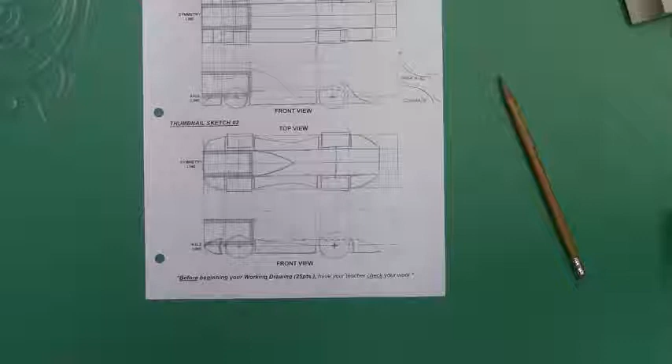You're going to find in your workspace today, you're going to have a compass, which in a moment we'll talk about the best way to use this. You probably have some type of French curve. Honestly, let's not worry too much about this right now. Everything I want you to draw is freehand, even your curves.

Don't get me wrong, you could incorporate this right now into your sketch. I guess you could, but a lot of what I'm going to do is just simply freehand, use this later to go over my curves and clean them up. And obviously you have a ruler. Okay? We've got all the tools we need. So let's focus on this tool for right now, this thing.

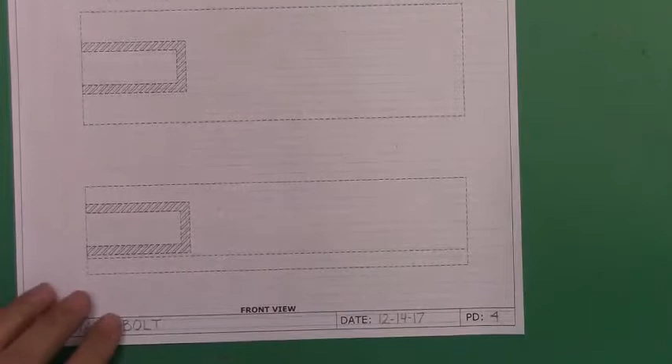So if you flip this paper over, yesterday, put in our name, date, period. Okay? We spoke a little bit about how this paper is being broken up. First of all, this drawing is 1-to-1 scale, which means it's actual size, correct? Yep. So what you see is what you get. So what we also have here is a grid. And every one of these squares measures 5 millimeters by 5 millimeters, 5 by 5.

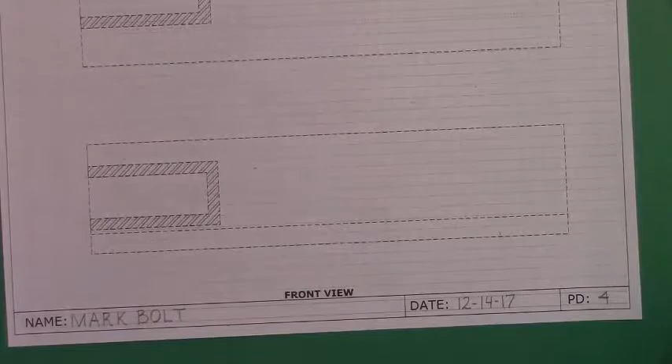We also have, if we take our ruler, a large rectangle that if I measure it, it measures 21 centimeters, which is 210 millimeters. Okay? If I measure the height of it, it measures 50 millimeters. So according to my specs, I cannot make my car body longer than 210, which is this point here, and no taller than 50, which is that point here. So there's my workspace, folks. My car's got to fit inside this space.

Dashed line here, we're going to refer to this as our axle line. So somewhere here and somewhere here, we're going to be drilling 2 holes in time. And then we look at this shaded area, this hatched area. Be careful here. The specs tell you that when you're drawing this, the minimum thickness on your drawing is 5. Well, if you were to measure this right now, you would actually find that there's your 5 millimeter thickness. Okay? You can draw right up to the edge of that. You can do that. But there is a little side note here.

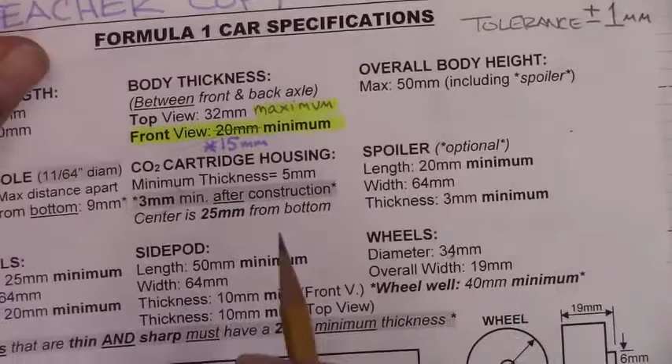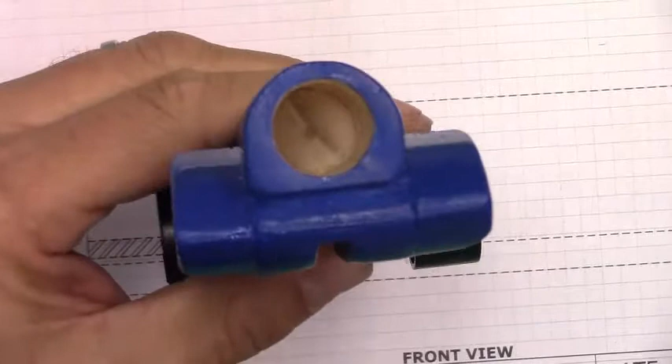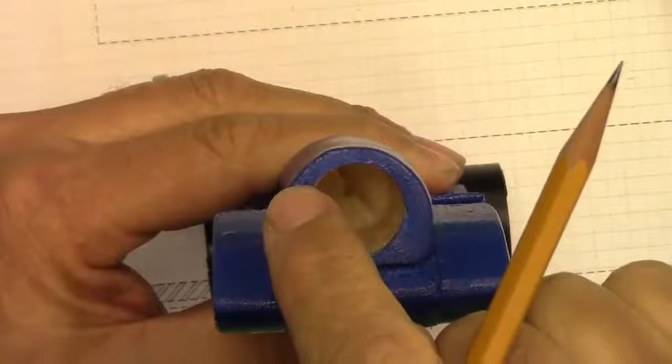When the day comes and you're actually cutting out your car and then sanding it, cleaning it up, I will let you, all said and done, you can take this CO2 cartridge housing and go, for example, from 5 millimeters, you can make it as thin as 3. There's no tolerance here, meaning not plus or minus 1, just 3 minimum. So this is the only part of your car where what the specs say is what it can be in terms of minimum thickness. Okay? So this can be no thinner than 3. No thinner. All said and done.

The rest of this design does have a tolerance of plus or minus 1. So in reality, I say 180 to 210. If you turn in a car and it's 179 in length, is that okay? Yeah, you're fine. Don't cut it to 179. Cut it to 180. Keep in mind you're probably going to be removing about 1 millimeter of material when you're sanding it. Okay? So that's kind of where the tolerance comes in.

All right? Now, one other thing we'll talk about in a minute is this number here, 15. Front view, body thickness between front and back axle. We're not going to spend too much time talking about that yet. We're going to first lay down some lines here for our car body. So here's what I'd recommend you do. I'd recommend right now that you pick up your pencil and start drawing / sketching a car body.

Okay? Keep in mind that there was one little step I had you do yesterday, which was take your ruler, put it in the bottom left-hand corner, right here. And as I measure right at the 18 centimeter mark, right here, I put a little dot on my paper. Because I know that when I draw my car body right now, the front of my car can be no shorter than this, and obviously no longer than that. Do we remember that? Okay? So make sure you have that mark in place.

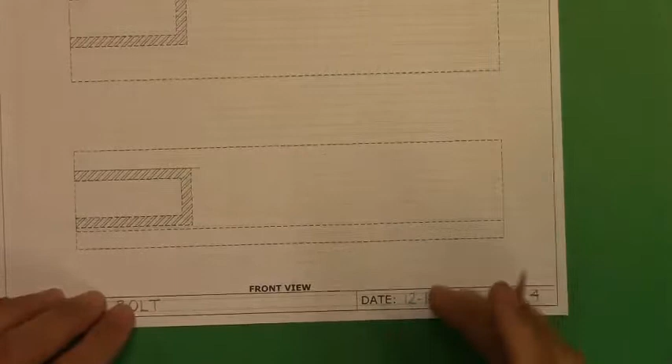Now once I get here, I need to think about obviously a nice aerodynamic design, something we've been talking about on the front of your paper. So I'm just going to freehand, and I might end up with some type of bullet shape, so I'm just going to stop right about here for now. Just going to leave it just like this. Okay. And then I'm going to go ahead and pick up my ruler and continue forward.

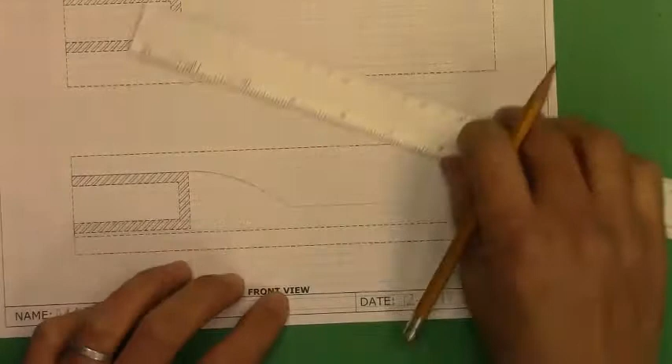Okay. And then for now, I'm just going to draw something that probably looks kind of like this. Just for now. This could all change. This is just the beginning. Okay, I'm just going to stop right there. So if I look at what I've done so far, height-wise, we said no taller than 50, and if I measure this, that's 40, so that's fine. No taller than the block. Lengthwise, as long as the front of your car falls somewhere between 180 and 210, that's legal.

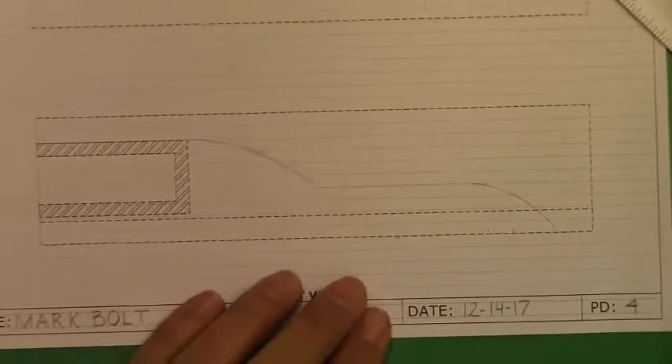But let's keep in mind that there's one other spec that's going to come into play, and I just want to talk briefly about it. It's this spec right here. Body thickness between front and back axles, front view, that's the view we're drawing, 15 millimeters minimum. So let me show you a car where I can actually show you the specification. Let's take a look at this blue car here. So remember, body. We're not talking about airfoils, not talking about side pods. Let's take the body of the car. So here's your rear axle, here's your front axle.

So what this spec means is that if you look at this area, the thinnest part of your car body between the front and back axle can be no thinner than 15 millimeters. If I were to take this ruler and measure it and see what this kid did, I would say the thinnest part of this car is right here. Remember, not the side pod, the car body. This measures about 20 millimeters. So this student could have made it thinner had they wanted to. They could have taken off 5 more millimeters and still be within specs. So this is the thinnest part of your car body.

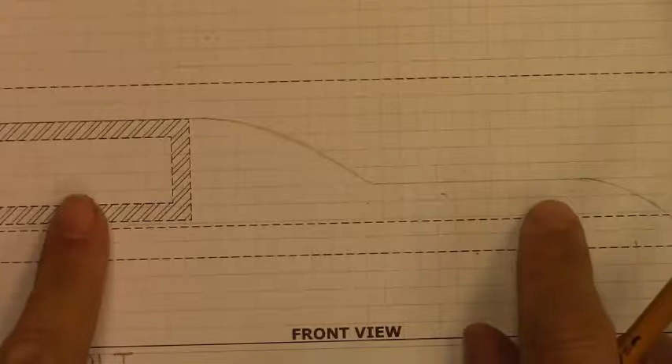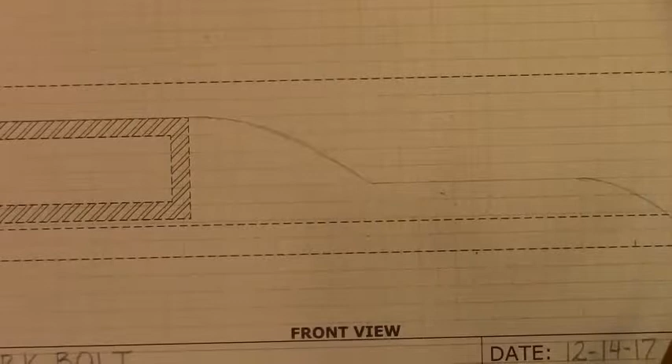Car body. You'll notice with mine, first I don't have any wheels, no axles, so it's really hard to say where the thinnest part of your car body between your front and back axle is. Can't really tell you yet, but I did leave this section here kind of thick. For right now, I made mine 20, but I could have dropped down even further and made this 15. But I'm going to leave it at 20 for now because I have an idea of something I'm going to do later. So I'm actually leaving this thicker for now, but it will change in time. Okay? So if I look at my car body, for now, that's legal. That's acceptable.

Any questions? Yes? Say it again?

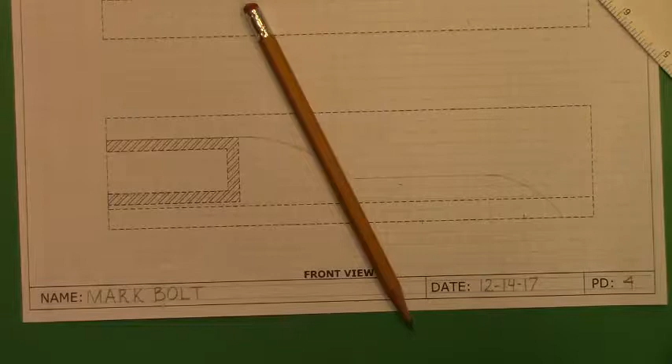Okay, great question. So here's why I put this here, between front and back axle. Because what she's saying is exactly what's happening to all of you. Once I get beyond the front axle, does my car start to get thinner and thinner and basically end at a point? Yes? Yeah, most of you are going to find that. And so once again, the spec is only referring to what's happening between here and here, which obviously then allows you beyond the axle to make this come to a point. So yeah, that's fine. Okay? Good question.

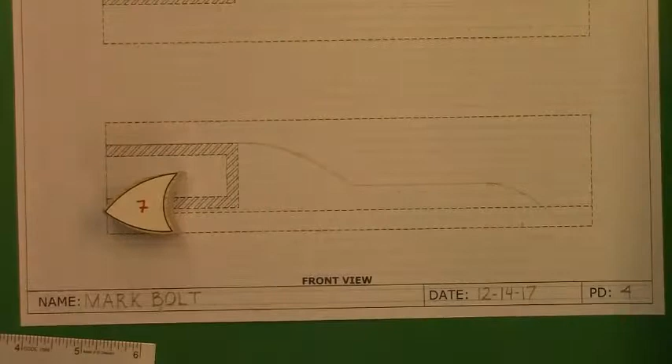All right. Moving on. So now we come to the airfoils. Okay, so here's an example of what an airfoil could look like. That could be a rear airfoil. And for example, that could be a front airfoil. Okay, so now we get to the airfoils. Keep in mind, after airfoils, we're going to have wheels.

And then we're going to eventually have side pods that kind of go in between. Okay, so there's all these different parts. All right? So we talked about convex, we've talked about concave, we've talked about redirecting the air over and around the wheels. So let's take a quick look at our specs.

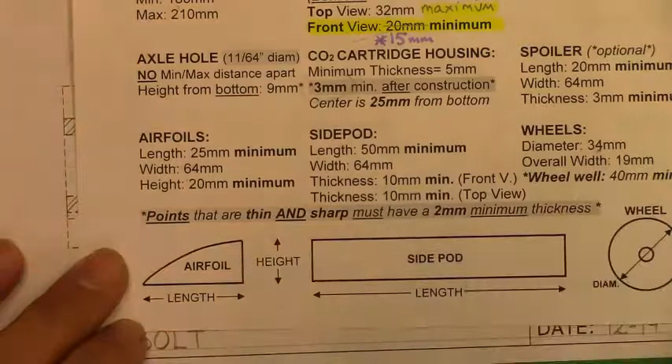So if I look at my specs for an airfoil, here's what I got. Airfoils. Minimum length, 25. So the minimum length is 25 millimeters. Don't worry about width. That has nothing to do with the front view. But height does. Minimum height is 20. Okay? So minimum 25. Minimum height 20.

Okay, so here's what I like to do. I'm going to start with my rear airfoil. I personally like to start in the back, knowing that I need to put a wheel here. Okay? So I'm going to kind of mark some limits. So if my rear airfoil is going to start here and end here, I know that it has to be at least this long. That's 25. So it needs to be at least this length, minimum. It can be longer, we know that, but at least from here to here is 25.

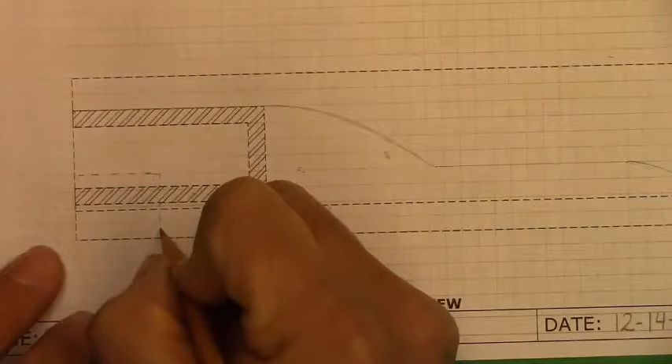I'm going to put my limits for height. Height would be from here to at least here. So if you kind of look, this is my workspace. Now I'm going to do something just so you can visually see what I'm doing. Don't do this. I'm just going to make a box just to use this as kind of an example. So if you imagine there's this rectangle on your paper that measures 25 by 20, your airfoil needs to either fit in it or it can be larger than. But it can't be much, if anything, smaller than this workspace.

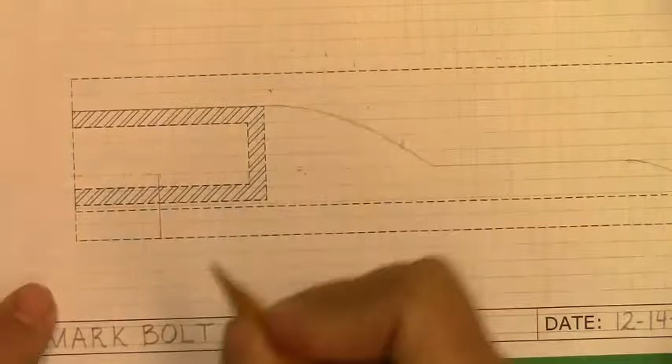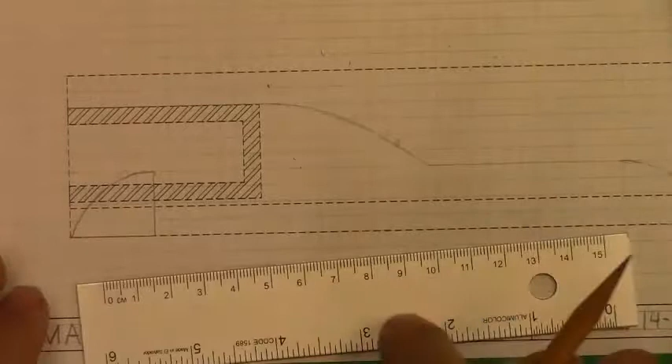Okay? So let me show you what an acceptable airfoil could look like. Let me just erase my box here. I could do something as simple as this. I could say, okay, vertical line here, that's 20 millimeters tall. And then a curve here. And then a line here. Done. That's an acceptable size for a rear airfoil or front airfoil. And here's how I know that. If I measure the furthest point to the left to the furthest point of the right, that's at least 25. And if I measure the height, that is at least 20.

That's acceptable. Okay, let me give you some other ideas. Some kids, rather than make this straight, they might curve this in. Okay, let's just say you do that. Is that still considered legal? The answer is yes. I'm going to use a ruler to show you my limits. So if I take the furthest point to the left and the furthest point to the right, when you measure limits, you put your ruler horizontally. So I could basically say that this has a length of at least 25. So that's legal.

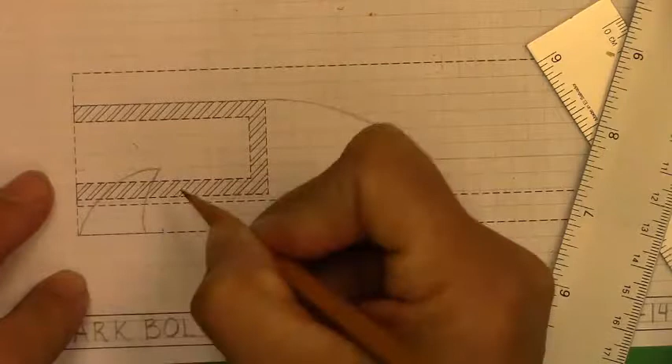Okay, but watch this. What if a student were to draw something like this? Knowing that from here to here is 25, is that still legal? So let's measure our limits. That's the furthest point to the left. Is that the furthest point to the right? No. The furthest point to the right still continues to be that point right there, which once again makes this legal. Okay?

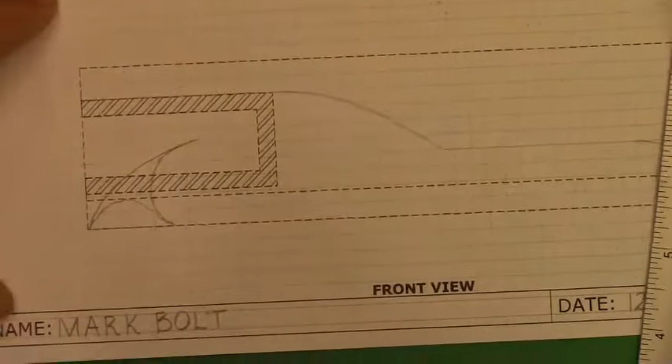But now I'm going to show you something I don't want to see. I hope I don't see this. It looks great on paper, but this will never survive construction. So, as much as I want you to be creative and make some really neat, cool, innovative looking airfoils, you got to be careful doing something like this. It looks cool, but the reality is we're making this out of balsa wood. So when I get an airfoil that looks like that, as cool and neat as it looks, it's impossible to replicate that out of a piece of soft grade balsa wood. Because here's what's going to happen.

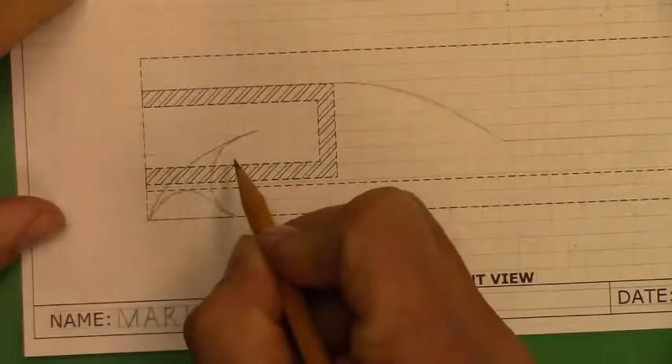Spec-wise, it works. But in reality, it's not going to look like this on race day. Here's why. You're on the scroll saw, cutting, cutting, cutting. I guarantee this is going to snap off. Okay. Big deal, Mr. Bolt. It's still legal. Yeah, for now.

You're sanding. Sanding, sanding, sanding. I guarantee that it's going to break off. Okay. Well, I think I still might be legal. I'm getting close, though. And you're probably going to drop an airfoil once or twice. Or maybe you keep sanding, and next thing you know, that breaks off. Okay, so that's your airfoil on race day. And the bottom line is, that's not legal anymore.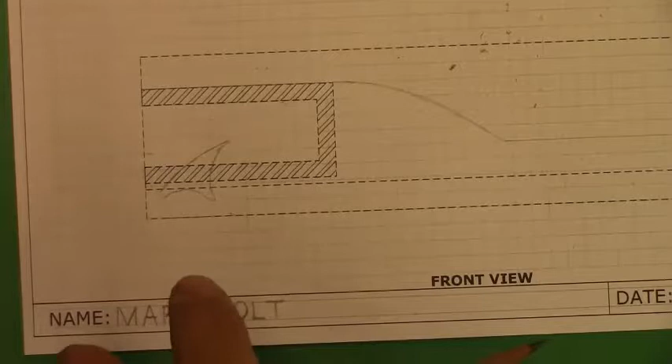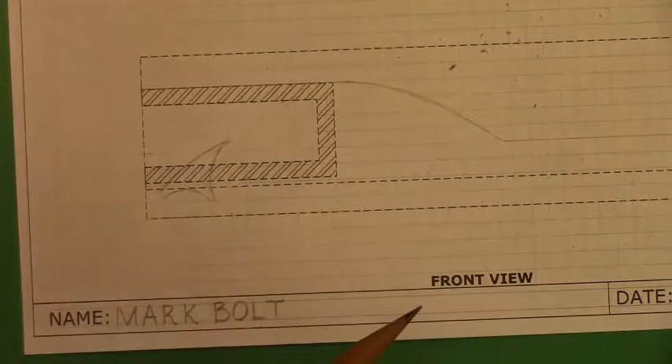Okay? So when you draw airfoils, keep this in mind. If you make something too big or too thick, you can always go back and make it thinner. Of course, it's balsa wood, soft grade. It's like sanding air. It's very easy to shape. What you can't do is say, well, I got a small airfoil, can I make it bigger? Well, here's the short answer. No. Go put that in the trash. Go design a new airfoil. And we need to give you a scrap piece of balsa wood and you need to try it again.

Okay? So let's be realistic here, folks. As much as we're pushing ourselves to make lightweight parts, the reality of it all is we have to have parts that have strength and stability, support. So going back to my limits, there's my minimum height, here's my minimum length. I could get away with doing something like this. Maybe I'm going to curve something in. And remember, work in progress. That curve there could eventually change.

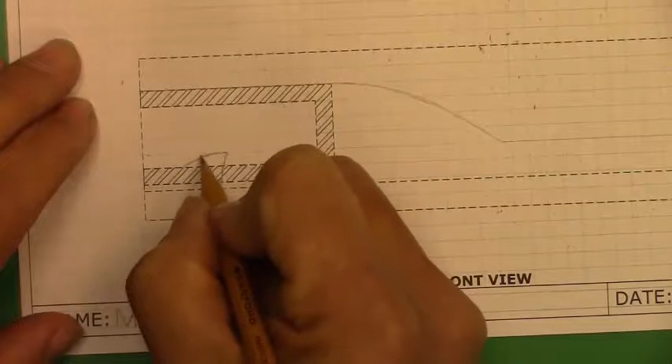Maybe I'm going to draw something like this. And I'm just sketching. And this airfoil here has enough material. Yes, it does have points, sharp points, but they're not thin and sharp points. So remember, I could even in time remove a little bit more material after I cut this out, just to reduce a little bit of mass. But as long as I'm keeping that minimum length and minimum height, that's what's important.

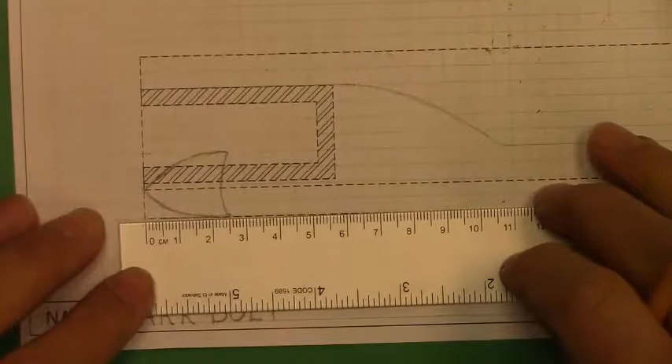Okay? You'll probably remember that whenever we cut wood, we never cut on the line. We always cut just outside this line. So we're not going to cut this exactly 25 by 20. We're going to end up cutting it a little bit bigger and sanding down to the outline of your pattern. So keep in mind, we're always going to cut things slightly larger to begin with. So this is legal. If I were to measure this, overall length is at least 25, and overall height is at least 20. That's legal. Okay? Any questions?

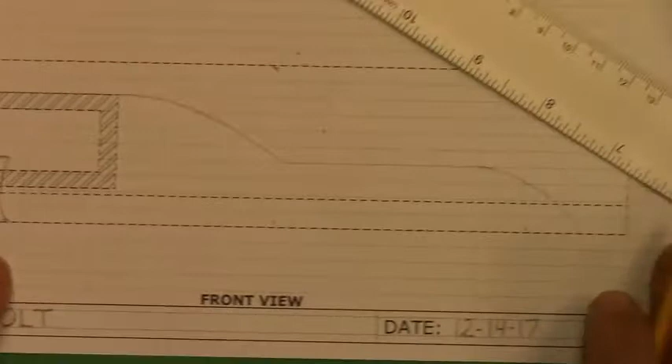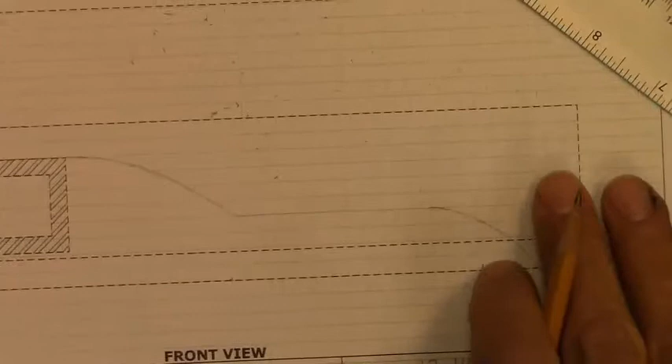Okay. So what do we do next? We draw the front airfoil. Alright, so we're going to take that same step. We're going to do the same thing again, and we're going to draw that front airfoil. Okay? Alright, here we go. So, as I work my way to the front of the car, and it doesn't matter which one you start with, some of you may have drawn your front airfoil first, that's fine.

Here's what's going to happen next. So I'm going to go ahead and go from here to here. And then, like I said earlier, I like to do this. This is something that just keeps me honest. I know that if I'm going to have my airfoil start from the front of the car and go back, the minimum length can be 25. Now it can be longer. I can make this airfoil 40 millimeters long if I wanted to. I could. It's my car. As long as it meets specs. I'm not saying that's the best thing to do, but once again, you could do that.

And now I'm going to draw my front airfoil, and I kind of use a convex shape here. I might do something a little bit different on the front. And who knows, I might even make this airfoil a little bit taller. I might not. We'll see. And just keep in mind, be careful with these really sharp points, so that we're not setting ourselves up for disaster when it comes time to manufacture the part.

Okay, so I'm always keeping in mind that I need a little bit of thickness here. You can always go back and make a part a little bit smaller as long as it still stays within specs. Okay? You can always make those changes. Okay.

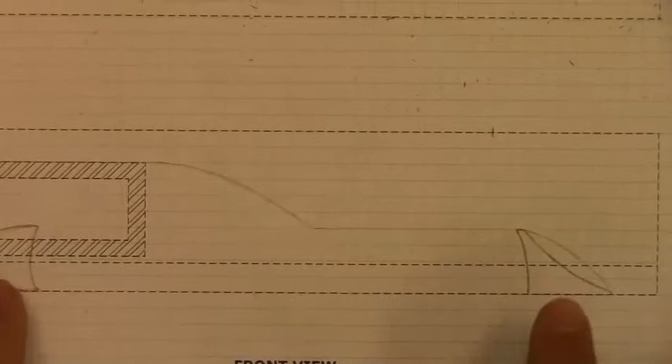First of all, you don't want to move on to this next step until you have double, triple, quadruple checked that these parts meet minimum specs. Don't move to this next step until you're sure that what you've got is, if not spot on, slightly larger than the specs I'm giving you. Because if not, you're going to end up going back and having to make a lot of changes. So, this checks out. This checks out. So far the body checks out, and that could be adjusted.

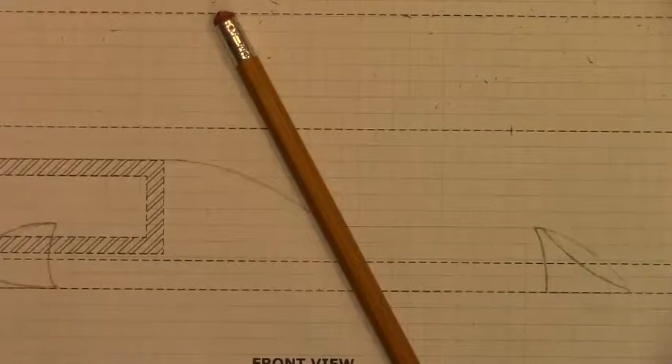We're now going to direct our attention to a new spec. I want you right now just to make sure that things are looking legal in the world of airfoils. And here's how this next spec is going to work. Now that I've got my rear and my front airfoil, let's just say this is a wheel that you're going to put on your car. There's one. And there's another.

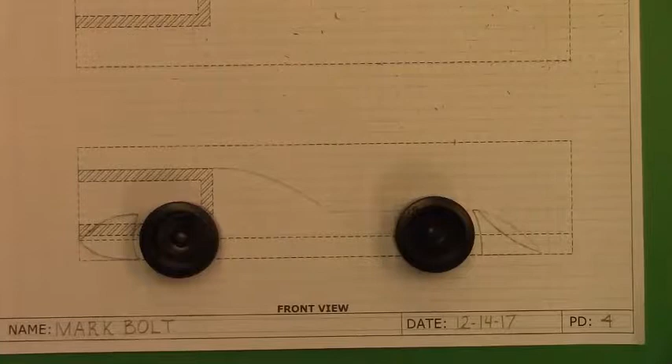So here are a few things we've got to be very careful with. That distance right there between part and wheel. The obvious is you don't want the wheel to be too close, because as it spins it could rub against the part. That's surface friction. So what I'm going to direct you to is this piece of paper right here, and there's two pieces of information we're going to look at.

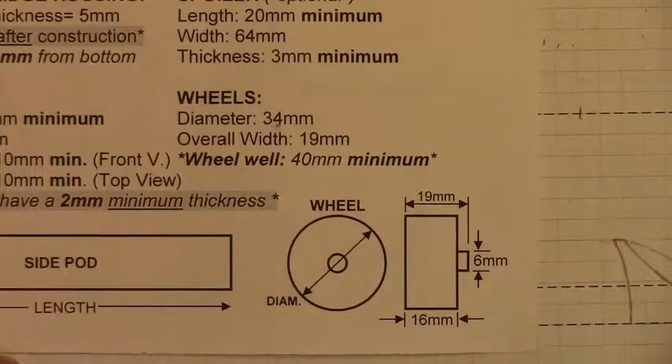The wheels have a diameter of 34, roughly. It's a little under 34, like 33 and some change, but for right now we'll just say that the wheels are 34 millimeters in diameter. If you're looking up on the big screen, you'll see that when we use a compass, I'm telling you which hole to use to accurately draw a fairly close 34 millimeter diameter circle. It's going to be just under, but the wheel itself is more like 33 and some change, so it's close enough. That's an easy thing to do. Draw a circle, been there, done that.

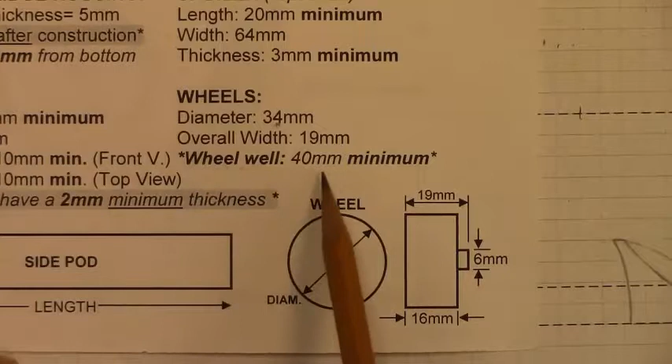But what we also have to be very careful with is this thing called the wheel well. Let me show you what a wheel well looks like. According to this, the wheel well has to have a minimum of 40. So it can be more, and you've got to be careful if it ever becomes less than 40. Let's take a look at this car right here. Here's your wheel well. If you were to take a ruler and measure from the inside of the side pod to the inside of the front airfoil.

Watch this, I'm going to put my ruler on center of that circle. You can see it's kind of a half circle. This student here missed their mark by about 2 millimeters, which could be an issue on race day. If I start here, that's 0. 10, 20, 30, 35, 36, 37. Their wheel well spacing here is about 38. So they're about 2 millimeters shy of what I would consider specs, 40 millimeters. Give or take a millimeter, right?

So what does that mean? Well, this is what happens if you make this area too small. If you put a wheel in, I can see where they made their mistake. This side looks good. You see how there's more space here? You see how this becomes a little bit closer to the wheel now? So big deal. Well, here's what's going to happen on race day. As your car is going down the track, of course your wheels are going to spin.

But I'll tell you right now, these wheels wobble a little bit. I mean, they wobble. And more than likely, that's going to happen as it's going down the track. If this thing were to wobble too far in one direction, you'll notice there is no contact, right? I'm actually forcing this wheel as far over as it can go, and it's not making contact. Good. But if I now force it in the opposite direction, what do you see?

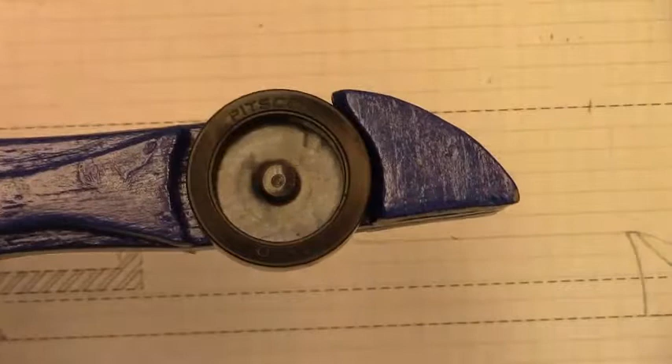So here's how you do it. If you take a look at your paper, let me start with this airfoil right here. And I'd really ask that you don't hit the pause button for a minute. You got to see it to believe it, folks. So just watch this, and then I'll cut you loose, and you can do this yourself. The first thing we're going to do is find 20 millimeters. Watch. Take either airfoil.

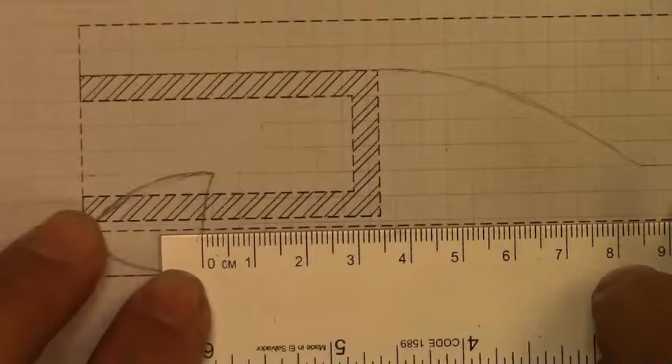Take where the airfoil intersects with this dashed line. Don't do this, I'm just going to put a point here so you know what I'm talking about. This point right here is where the inside of the airfoil intersects with your axle line. You see that? You're then going to take your ruler and measure from that point a minimum distance of 20 millimeters. It could be more, but for right now, just follow along. I'm going to make it 20. So from here to here is 20.

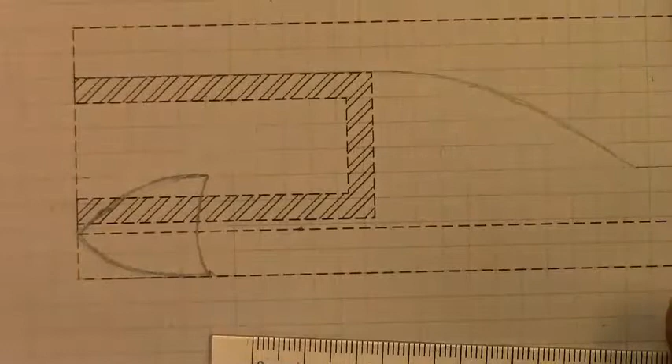So guess what? I just marked the center of my wheel well. That's the dead center. Because if this is 20, then I know I'm going to have another 20 millimeter gap here. That should work out. So here's how we then use the compass. According to my slideshow, when you place this here, you're going to be using the holes on the left, not the first, not the second. The third hole is for drawing wheels.

And it's actually very important how you use your pencil. Watch this. I don't just put my pencil inside. I actually keep my pencil closer to the outer edge of that circle, so you have to really kind of push outwards. Here, my pencil's here. It's not on this side of the circle. It's not in the middle. I use the outer edge when I'm making this circle. So as I'm turning, I'm forcing that outward. So I'm going to make a circle, and it's going to look kind of like this.

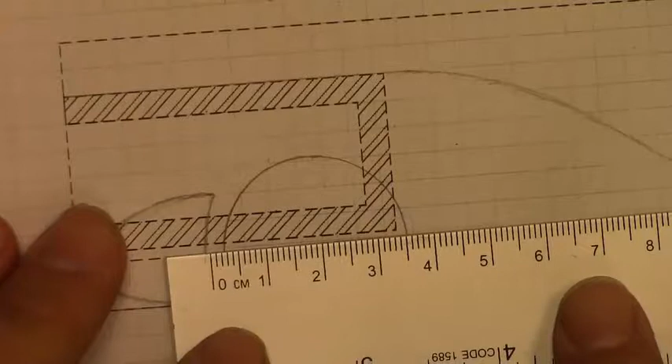So make sure that that brass ring is centered, which we can see it's centered. I'm going to take this outer, and I'm going to make a circle. I'm going to move away. There's my circle. Now I'm not done yet. In theory, if I measured everything correctly and drew my circle correctly, I should be able to take my ruler, and there should be, that's 0, 1, 2, there it is, a minimum of 3 millimeters between the inside of the airfoil and the wheel.

Now, don't just think I'm measuring that one area. I could measure down here. That looks good. And I can measure here, and guess what? Up here it's more than 3. It's actually 4. That's fine. But no less than 3, or you risk wheels wobbling, moving, and making contact.

Now, you could take this one step further if you so choose. Watch this. Some kids like the inside of their airfoil to conform to their wheel. So here's what I sometimes do. I'll actually erase this curve.

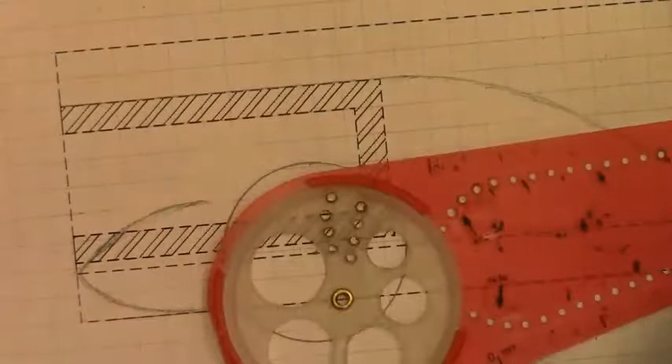And if you want to make a wheel well the same shape roughly as your wheel, I'm going to put that back here. Now I'm going to use that outer hole. And here's what I'm going to do. I'm going to kind of place it right where I need it, which is right about here. And what I can do here is I can actually draw a new curve that kind of conforms to the wheel. Okay? That's personal preference. You can hand draw it or you can do what I just did. It's really up to you.

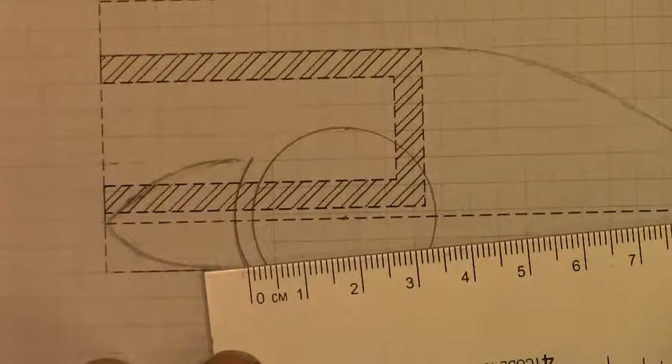Like I just mentioned, we've got to make sure, double, triple check, that we're getting a minimum of 3 millimeter gap between the wheel and the inside of your part. That's extremely important. Okay? Or we risk, once again, having parts touching wheels. Okay? Any questions?

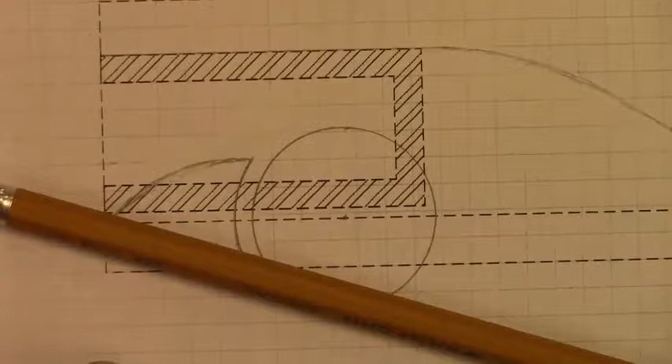Okay? So I'm going to do this one more time. So if you didn't get it the first time, I'll do it a second time. Let me come over here. Okay, so here's the name of the game. First, you draw an airfoil that meets specs. Second, where this dashed line intersects with this inside part of your airfoil, you want to measure out a minimum. You can measure out more. I'm going to do a minimum of 20.

So I'm going to go bare minimum. You can go 21. You can go 22. You can go 23. I'm going to do 20. Okay? So once I set my mark, I'm at least 20 millimeters away. Here's where you sometimes have to do some cleanup. Because I'm going to tell you right now, this is probably sloping too far towards the wheel, and I'm going to show you what I mean by that.

I'm going to put my compass back on center. Once again, I'm going to be using not the first, not the second, I'm going to use the third, and you try to keep your pencil as far out towards that edge. And I'm going to draw my wheel. And I'm going to tell you right now that I may have gotten it, but I may not. I'm going to have to just let my ruler be the judge of that.

Okay, so I am spot on 3. That's 3 millimeters. 0, 1, 2, 3. I'm good there. Which means I should be good there, and I'm obviously definitely good here. Right here, this gap is about 6. So you've got to take multiple measurements. Don't just measure that one area. Okay?

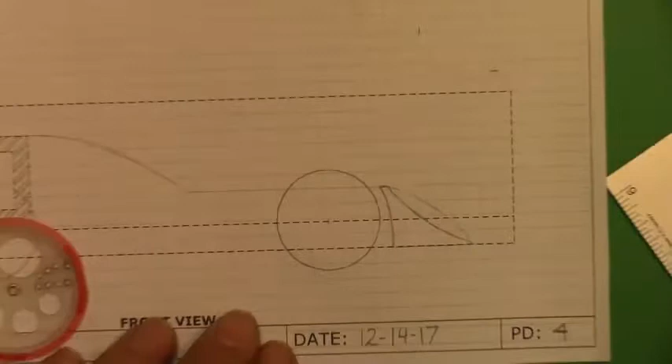So really, people, honestly, that's probably one of the harder steps because wheels play such a big role with the parts. Think about it. If your wheels and your parts are not properly spaced, then you are creating some serious surface friction. Okay? So as we've said before, we kind of start from the outside. We're working ourselves inward. What would be the next step? Side pod.

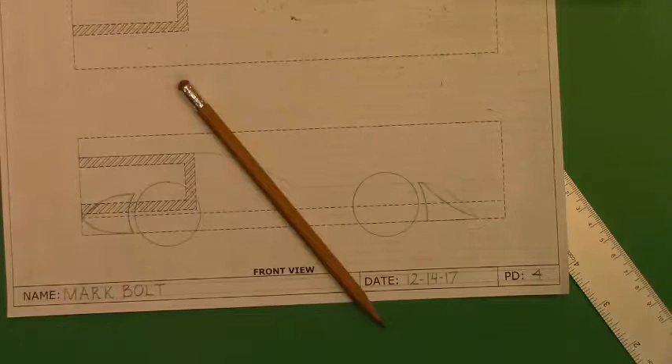So at this point, try to catch up, and trust me, there's no race here today, folks. We're lucky. We've got time to go through this and not feel rushed like my other classes. Not to say I was cracking the whip for 45 minutes, but we were trying to move at a good pace. We can take our time today with the amount of time that we've been given. But obviously, we want to try to get this drawing knocked out. Okay? All right.

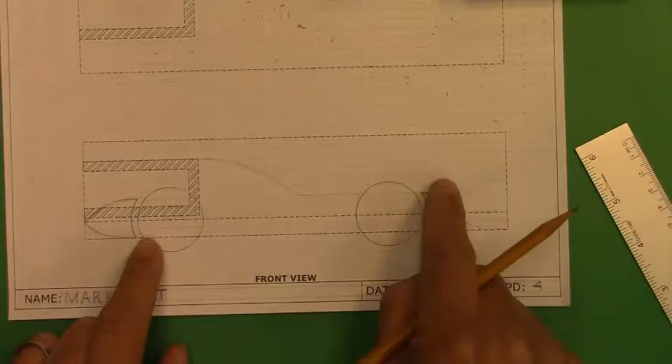Now, at this point, body, front and rear airfoils, wheels, everything seems to be going just well. So now we're going to focus on this space right here. Remember, we're redirecting that air over and around the wheels. What we want to keep it doing is moving. We don't want that air to get trapped. We want to keep it moving. So that's where that side pod comes into play.

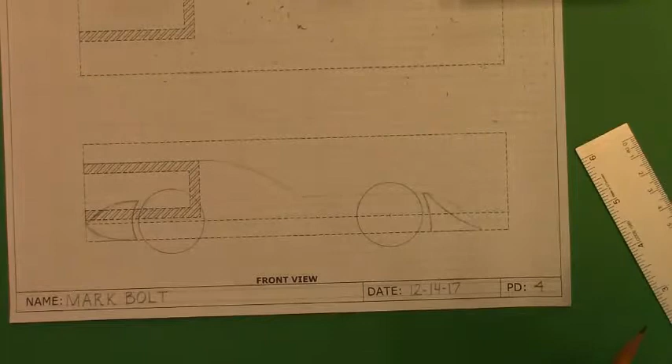And I've seen a lot of variations of side pods. Many of you have seen some on Science of Speed. I mean, some are just rectangular. Some are sloping. Some are curved. Some have maybe some type of parts to the side pod. Okay? But if we look at the spec sheet, once again, here are our limits.

Okay? The minimum length is 50, which is, I'm being pretty generous here. You can make a fairly short side pod, okay, with 50 millimeters. But when we look at thickness, we're looking at the front view. There's this number 10. Okay, that's a very important number.

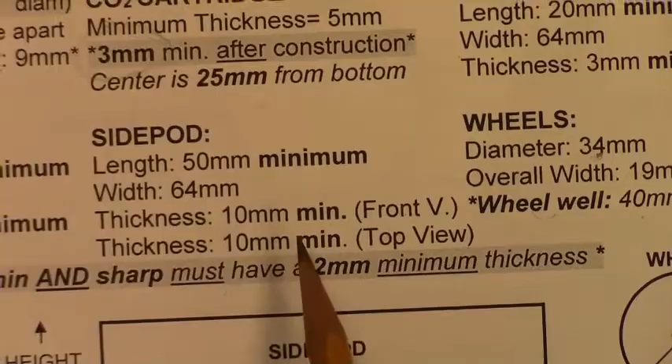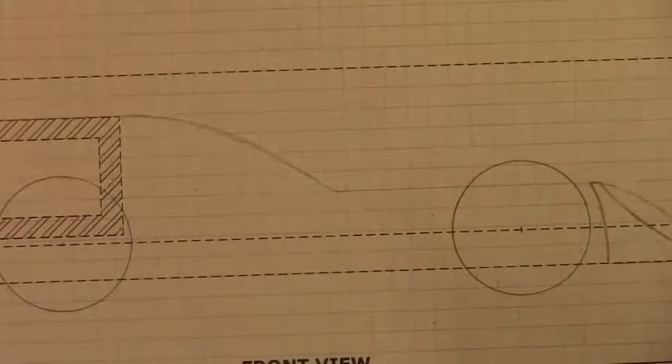Okay? So I want to remind you that I did something here in my car. I actually made my car body 20. And it's because of how I'm going to get ready to draw my side pod. I'm actually going to make my car body a little bit thinner because I'm actually going to take some material off the bottom. Okay? So let me just kind of freehand sketch a few side pod ideas. And many of you have your phones, so you're looking at a lot of variations of side pods.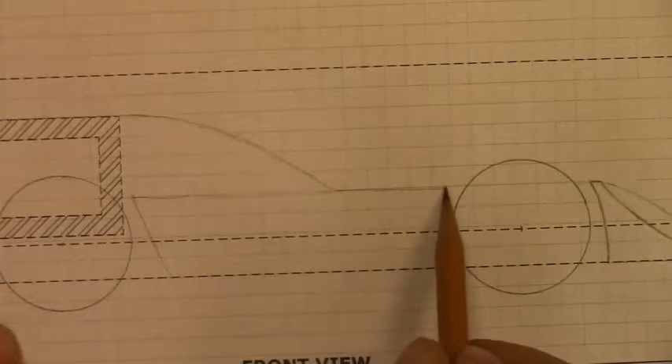I've seen some that kind of look like this. You know, a student starts like this. You know, maybe they draw a line going straight across. Maybe they go like this, done. Okay? I'm not saying that's the best side pod. I'm just saying that's one way of doing it.

I've seen some students where they have kind of a slope in their design. So maybe it kind of slopes downward. Keep in mind it's got to be at least 10 millimeters thick. Minimum is 10. But you know, I've seen some ideas kind of like this. Okay? And obviously I've just seen the good old-fashioned rectangle. Nothing wrong with that. Just a very thin side pod that goes all the way across.

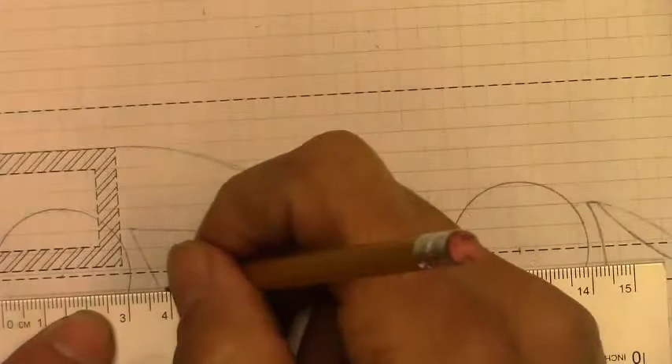And keep in mind your side pod does not have to align with the bottom of your car. I've seen some, and I use this word, that can float. A floating part just means it's not aligned with the bottom of your car body. It looks like this. So we'll say here's the bottom of your car, but your side pod is elevated. It's floating. Now let's just stop and look at this for a minute and ask ourselves, is that legal? Well, minimum has to be 50 for length, and minimum for thickness has to be 10.

So I'm going to put my two rulers just to show you my extent. So it goes from here, and it ends roughly here. So if I were to measure the overall length of my part, I'm finding that this part's 75 millimeters long at its extreme points, from here to here, okay, at its limits. So that's well beyond legal. Okay, 50 is the minimum.

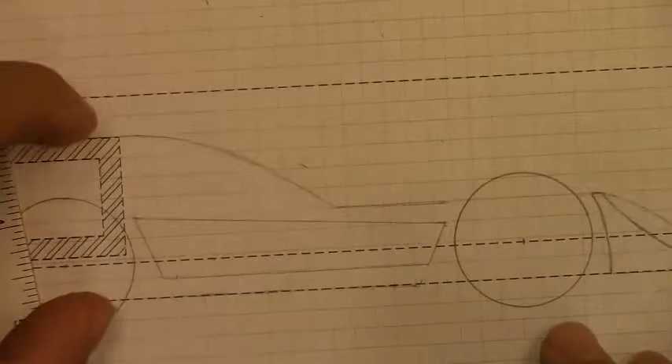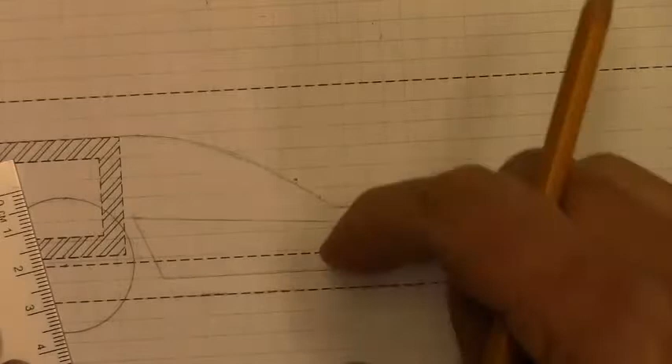All right. Another thing I have to measure is what I call thickness, and I don't use the word height. I use the word thickness. This is the highest or thickest part, but it tapers down to the thinnest part here. So if I take my ruler, this should be at least 10, which that is. So that is legal. Okay? I can do that. That's a legal side pod. All right? The thinnest part of my side pod is 10. And if I take the furthest point, it's at least 50. So that's a legal side pod. Okay? I can do that.

But now comes that last thing that we keep talking about now that we have wheels. Do I have minimum 3 millimeters here? I may not. So as I zoom in, I'm going to tell myself, you know what? I'm a little too close. Because that's 0, 1. I'm a little bit tight on 3. So all I need to do is erase some of this. Maybe this time around I'll actually put a mark at the 3 millimeter, so I kind of know where my limit is. I need to be at least there.

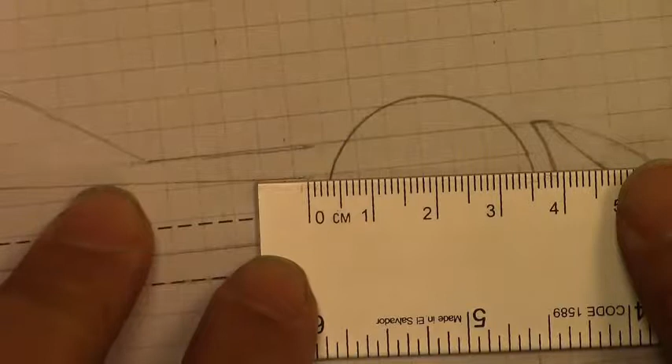And maybe give myself a little bit more space. There we go. Okay, that's a little bit more like it. All right. So there should be a minimum of 3 millimeters there. I'm just over 3. All right. So for my side pod, and trust me, I got some line work to do. This drawing is far from object lines. It's all construction. But if I were to ask you this question, is this considered a completed drawing with the required parts? The answer would be yes.

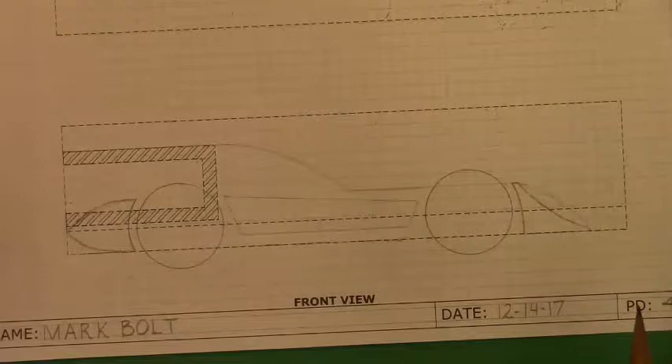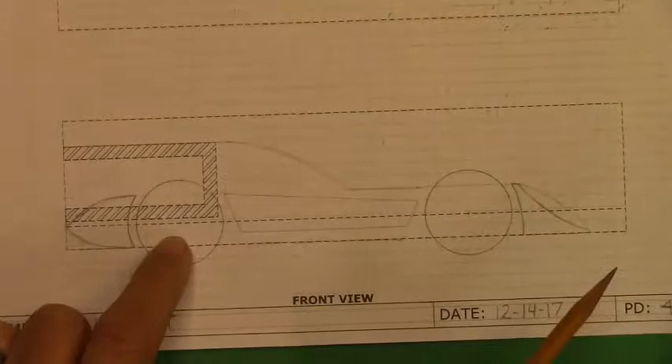And here's why. The required parts are a car body, check. Rear and front airfoil, check. Wheels, check. And a side pod, check. So that's considered complete with all the required parts. But there is an optional part, right? What is that optional part I could add? I could add a spoiler. And you have a choice. Okay?

So at this point, I could basically say that this car, for the most part, is done in the front view. Okay? It's done. I can move on to the next step. Now, I'm going to draw one because I'm sure there might be 1, 2, 3, 10, 15, 20 of you that are considering a spoiler. So I'm going to draw one because I can. Okay? For this last step. And don't get me wrong, I know that's going to be a hidden line. There's a lot of line work that needs to be done here. But for right now, I'm just laying down construction lines. Okay? Any questions so far? Okay.

All right, so let's talk about a spoiler. So as always, let's look at our specs. Keyword is optional. You don't have to put one on, but here's the good news. You could draw one today, realize later you don't want to do that. It's fine. You might end up not drawing one today, and later realize, I want to include a spoiler. You can do that. Okay? So you can change your mind on this one. But I'm going to draw one because I want to show you what it looks like.

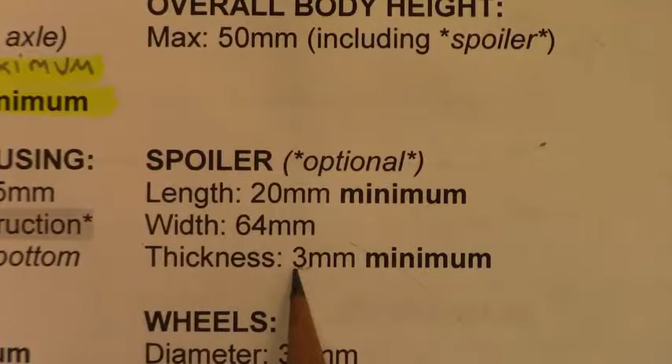Minimum length is 20, so this is a pretty short piece. Minimum thickness is 3. But let's just pause for a moment. If there's a tolerance of plus or minus 1, all said and done, how thin could that be? 2. But I'm not going to draw it 2. I'm going to draw it 3. And when I manufacture this part, I could end up with something even thinner and still meet specs, okay? All right?

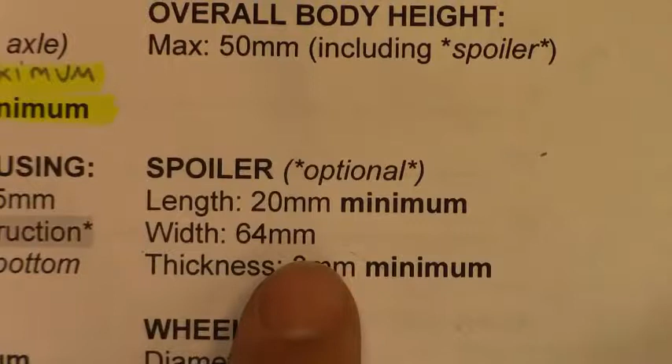Now, some kids will make this out of balsa wood. Some kids will 3D print this. And this is something I would consider 3D printing because it's very small and it's going to be lightweight. But I'll tell you right now, by volume, balsa is lighter than 3D printed material. Okay? So it's best to try to make this out of balsa, but you could 3D print it. It's very small, so it's a very insignificant amount of weight you're adding to your car.

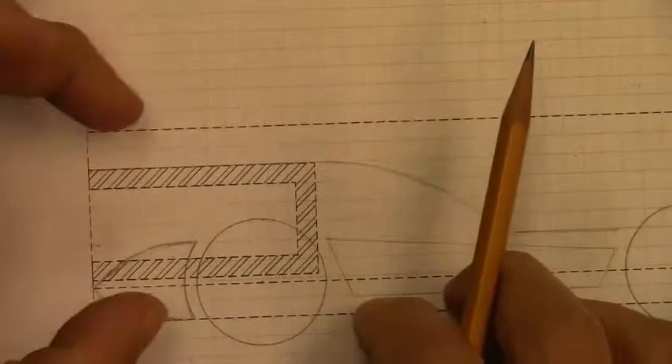All right? So here's how we could approach this. We could do a few things. We could, number one, put it right on top of the car as long as when we add the spoiler, the car does not exceed a height of 50 millimeters. Okay? Why? Because even with the spoiler, the body height cannot be above 50. So what some kids do is, if they have the space, they'll put it here. And some kids will just put it somewhere on the side of the CO2 cartridge housing. Okay? Personal preference. So I'm going to put it on the side of the CO2 cartridge housing, because I can.

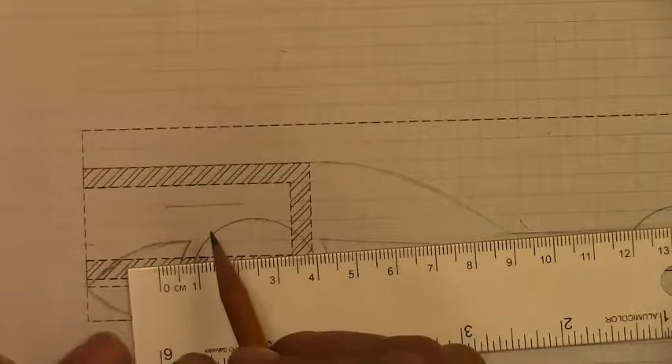So I'm going to draw some limits here. I know that the minimum length can be 20. And I'm just going to keep this completely horizontal. So I'm just going to draw a line that's 20 millimeters long. So we know that's the minimum length. And I know the minimum height has to be 3. So now I'm going to put a mark here at 3. Okay. I'm going to go ahead and once again draw a new line here, parallel.

Now because this is a part, I want to give it some good aerodynamic properties. A lot of times I'll do this. I'll kind of round off the back. Some kids might even make the back pointed. But I will definitely do something to the front because this is where we make contact. And a lot of times I and students will put what I call kind of a taper. Kind of like the fin of a rocket. Imagine that. There's that taper again. Okay?

You get the idea. At the end of the day, folks, this is a really small part of the car. It's very small, very lightweight. Which, as we said before, is a little bit more of an aesthetic component than really a performance component. Okay? All right. Okay? I'll leave it at that. All right? Spoilers are pretty easy.

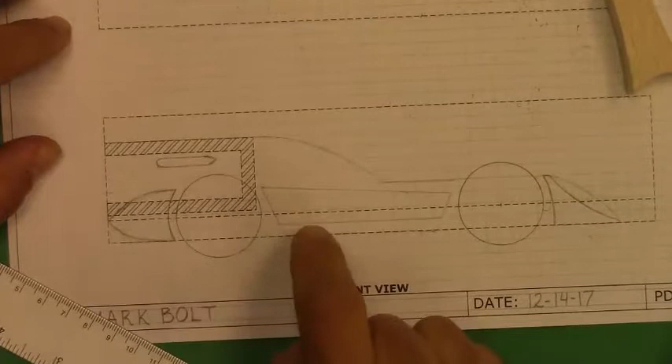Like I said, they could go here. They could go here. Some kids will even, rather than putting them horizontal, put them slightly at an angle, which in theory is what a rear wing does, creates a downward force. Okay? But right now, I would have to say that this is now, once again, a completed drawing. I got all the pieces and parts. Okay?